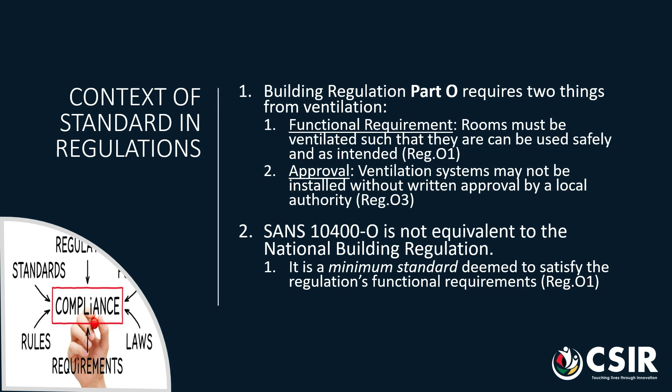As such, the regulations don't prescribe the SANS 10400 Part O as the only mandatory compliance route. The regulation maintains that a competent person is responsible for certifying that installations comply with the functional requirements of Regulation O1.

Regulation AZ4 gives a competent person some scope to use first principles and other recognized standards and methods as references for acceptance criteria. The responsibility, however, remains with this competent person to achieve and prove compliance with the building regulations.

Our hope is that the new SANS 10400-O will prove a suitable standard for engineers who want to achieve acceptable indoor air quality, together with energy efficiency goals.

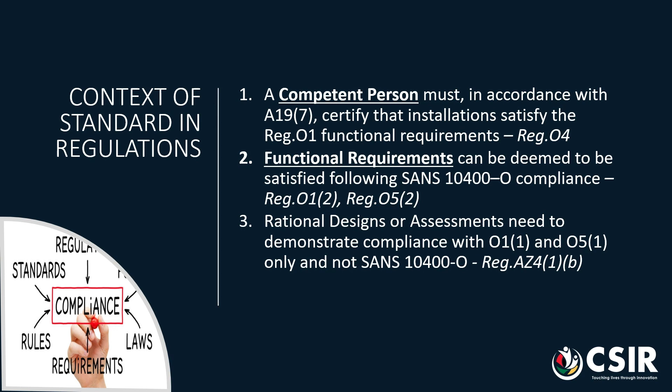There has been a paradigm shift in this standard relating to ventilation metrics and methods, in order to better align with international norms. The air changes per hour performance metric has been completely dropped from the new standard.

Ventilation rates are now expressed in terms of the number of occupants in the occupied zone. This allows high-volume rooms to be ventilated more efficiently.

The ventilation rates, prescribed per room type, as detailed in Table 2, are determined using the additive method. Here, the ventilation portion for occupants and the ventilation portion for the room type are considered separately.

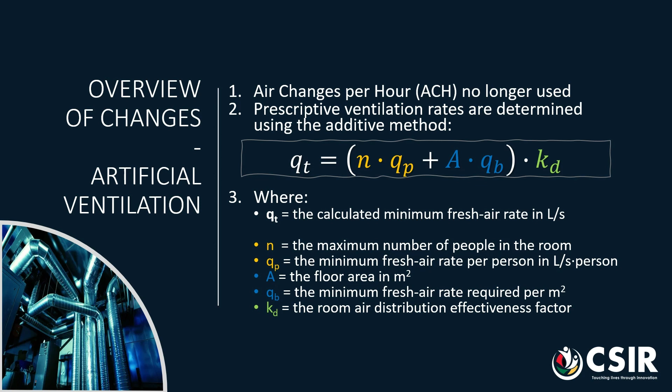You will also see this formula includes a room air distribution effectiveness factor, which we will discuss in some detail later on.

The adoption of the additive ventilation method is probably the most significant change to the standard. It was adopted because the additive method better lends itself to efficiently maintaining air quality in the occupied zone.

It means that the building owner or operator do not waste resources ventilating parts of the building which are neither occupied nor burdened with contaminant sources.

This is because it takes account of the occupied zone only and scales correctly for high-volume rooms. It considers room and occupant-based contaminant sources separately.

In addition, ventilation rates are determined for spaces with adapted and non-adapted occupants differently. In this regard, the volumetric air change rates, or air changes per hour, didn't address the functional requirements of Regulation O1 efficiently. Also, the application of air change rates in the previous standard was inconsistent throughout building and occupancy types.

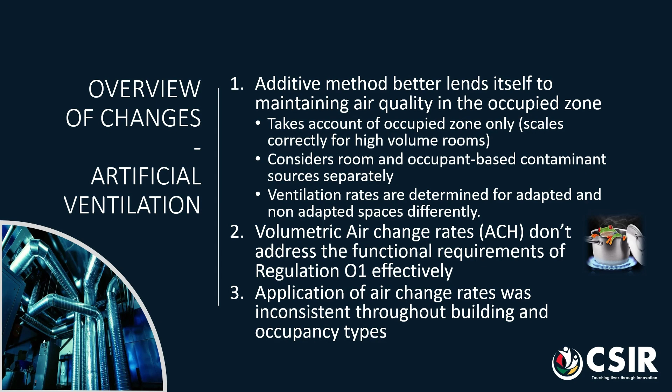We briefly mentioned that room air distribution effectiveness was a factor in determining the prescribed ventilation rates. There's some potential for confusion, as ventilation effectiveness can be defined in a few ways.

In order to be consistent with the functional requirements of Regulation O1, as well as major international standards, ventilation effectiveness is defined as the room's average contaminant removal effectiveness.

This means that a room with fully mixed flow will achieve an index of 1 or 100%. Some may be more familiar with using the mean age of air to define air change effectiveness.

In mixing ventilation regimes, there is a correlation between these different ventilation effectiveness indices. An air change efficiency factor of 50% equates to a contaminant effectiveness of 100%.

The ventilation effectiveness in a single space can differ seasonally, and therefore, the worst case should be assumed. It is possible to determine ventilation effectiveness experimentally using tracer decay methods or validated simulation models.

If these factors are not available at design stage, a lookup table for common configurations is provided in the standard. It should be noted, however, that the room's distribution effectiveness index is a positive scaling factor.

And is therefore the reciprocal of the ventilation effectiveness index, as defined.

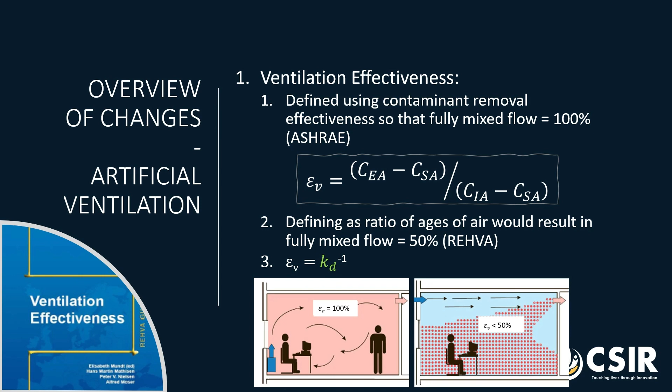The new standard also describes acceptable criteria for the recirculation and reuse of room air. This allows recirculated air, which has been adequately treated, to be reused for primary ventilation purposes.

In achieving this, it is important to note that fresh air is defined separately from outdoor air. Outdoor air is defined in common terms, while fresh air is defined as any air which is sufficiently free from airborne contaminants and can be used for maintaining the required indoor air quality level.

Therefore, extracted air can be treated and reclassified as fresh air according to the limits of the various air contaminant classes defined in the standard.

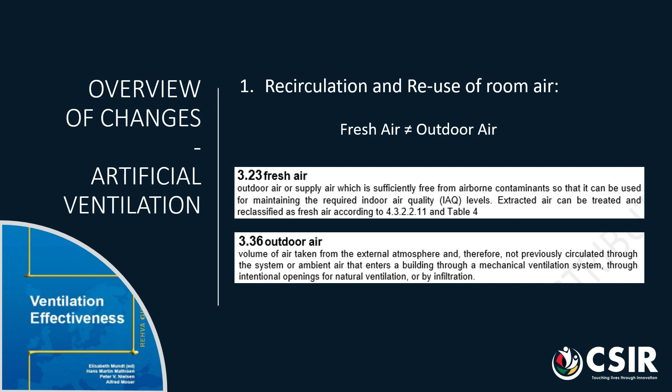Distinguishing between fresh air and outdoor air allows us to incorporate the application of high-efficiency filters and room air cleaner performance into our designs. This means equivalent clean air delivery rates can be included when achieving prescribed fresh air rates. This could permit reduced outdoor air requirements and thereby reduce energy consumption. This is particularly useful in permitting airborne infection control in healthcare facilities, using the most economical methods available. Note that there are limits of application between the air contamination classes as defined in the standard.

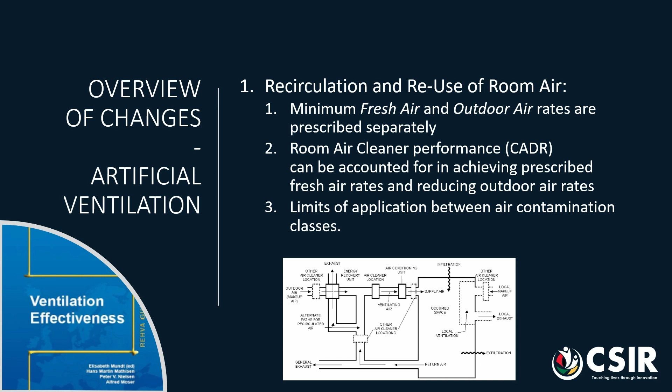Some big changes are also present in describing natural ventilation performance. Equivalent performance criteria for naturally ventilated spaces can now also be found in Table 2. Other natural ventilation criteria are based on best practice guides, such as the CIBSE AM10 and the WHO guides. Mixed-mode ventilation systems are now also recognized and defined, following best practice from the CIBSE AM13. Quite significantly, natural ventilation and air conditioning may be applied in the same space concurrently.

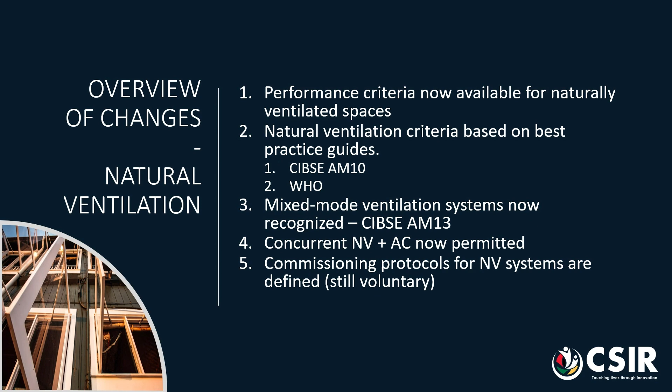Obviously, this should only be done following the component manufacturer's recommendations. An informative annexure has been included as guidance on commissioning and testing of naturally ventilated systems. There is a work plan in place to expand the section into a standalone standard, incorporating ISO 12569. Also covered by the standard are methods for validation of naturally ventilated spaces using tracer gas dilution testing. Typical methods employed here would be CO2 decay or passive step-up tests.

CO2 sensing can also now be used to drive demand control ventilation for intermittently occupied spaces. Take note, as there are specific rules regarding run-on times and post-occupancy flushing.

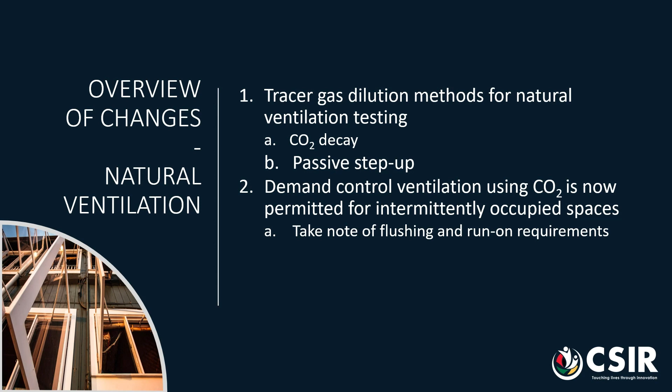Performance criteria are now available for naturally ventilated spaces. These criteria are prescribed as indoor carbon dioxide limits, which are based on mass flow balance calculations, using ventilation equivalents in liters per second per person. You might be familiar with the equation shown here. The assumption is made, for most spaces, that the concentration of CO2 in exhaled breath and outdoors is constant, as is the volume flow of a room occupant's breath.

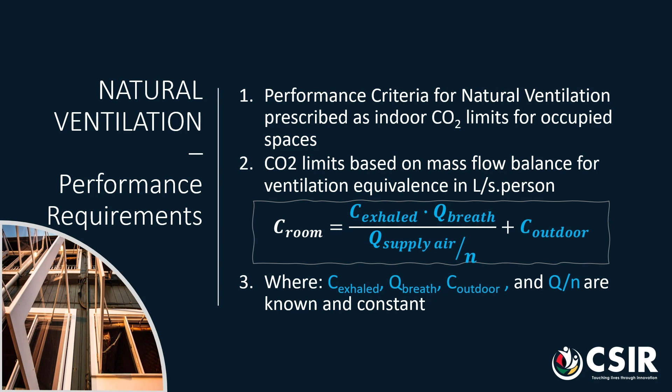It would be a good idea to run through the process by which the minimum outdoor airflow quantities are selected for your designs. A typical room data schedule, supplied by a developer to an engineer, could contain information as represented here. It is not unusual for the engineer to have restrictions placed on the arrangement of the ventilation terminals, and for scant information to be available on occupancy densities or indoor air quality requirements.

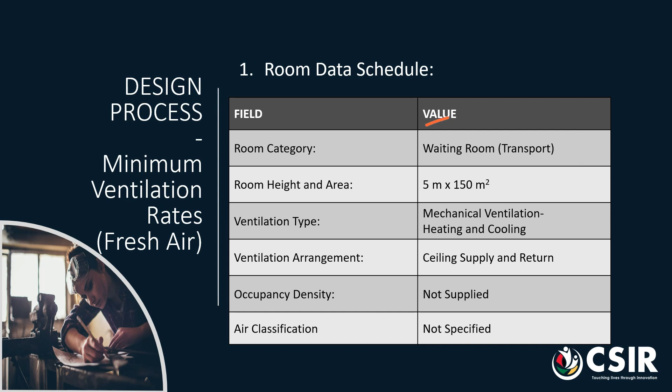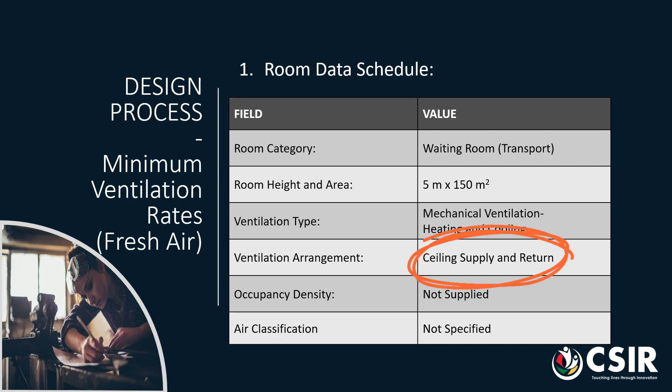For our example, we'll assume a waiting room for public transport using the following room size and height. The space will be mechanically ventilated with heating and cooling supplied through the ventilation system, with supply air and extract air registers at ceiling level. We've already been introduced to the equation for calculating the minimum fresh air rate. We can now run through how the various parameters are obtained.

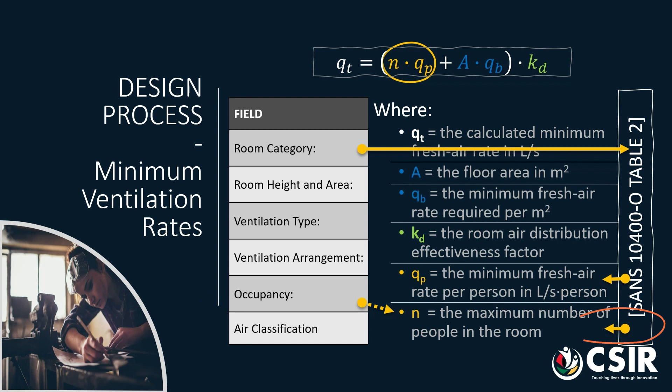Firstly, QT is the resultant fresh air rate we want to calculate in liters per second. For the first term, we need to calculate the product of N and QP. N is the maximum number of people in the room, and QP is the prescribed minimum fresh air rate required per person. If the design occupancy of the space is given by the developer, then that value should be used. In the absence of design occupancy values, the default values presented in Table 2 of the standard can be assumed. The minimum fresh air rate, QP, should be taken from the standard.

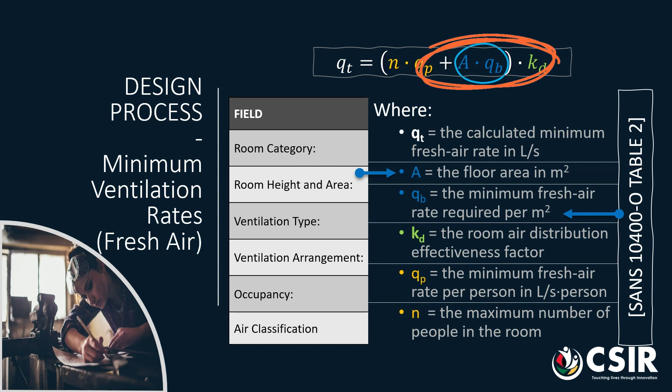Next, we need to calculate the area portion of the total fresh air requirement. This is the product of the floor area, and QB, the minimum fresh air rate required per square meter. The floor area is already given, and QB is found in Table 2.

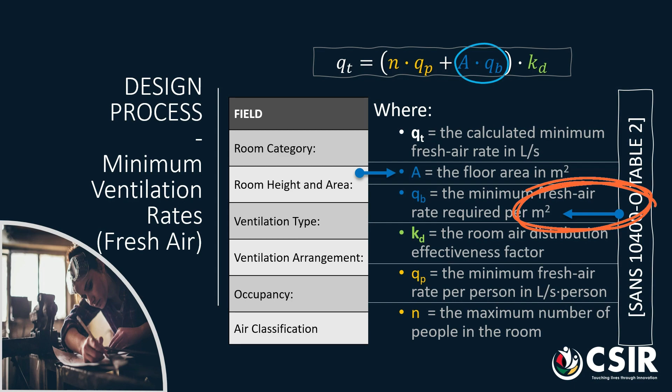Back to column 2 of Table 2. In this case, QB is 0.7 liters per second per square meter, and the product of N and QB gives us 105 liters per second. This calculated value is the outdoor air baseline for the space, and represents a baseline ventilation rate for demand control applications.

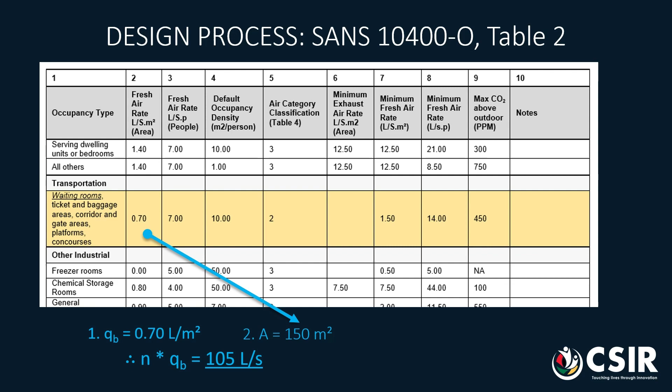Next, we need to determine the air distribution effectiveness factor. For this, we refer to Table 3 of the standard, and use available design information, such as ventilation type, ventilation arrangement, and air classification requirements.

This is an extract of Table 3, detailing some basic ventilation configurations and their related effectiveness factors. Configuration 2 best matches our example, where we've got a ceiling supply of heated air, which would not reach within 1.4 meters of the floor during worst-case winter scenarios. I understand that better design solutions are available in these cases, however this example is intended to illustrate the impact of limited design choice and suboptimal configuration options.

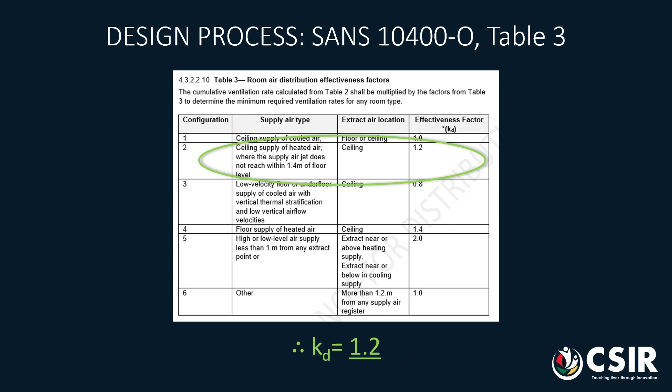Configuration 2 gives us an effectiveness factor of 1.2, which would be equivalent to an air change efficiency of 80%. This calculation may look complicated to the uninitiated, however it's quite a simple algorithm. It's merely the sum of the space and the occupancy ventilation portions, factored by the air distribution performance potential. Putting these values through our algorithm gives us a minimum fresh air rate of 252 liters per second.

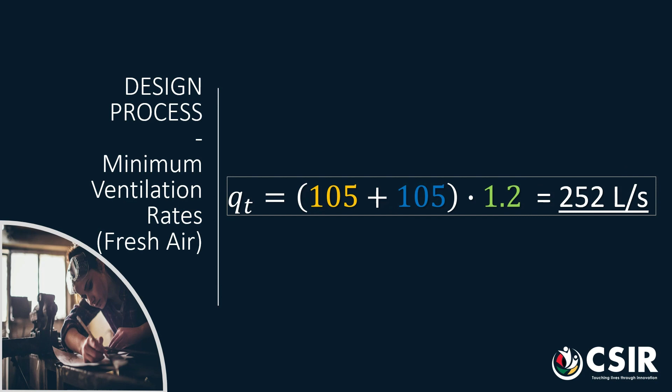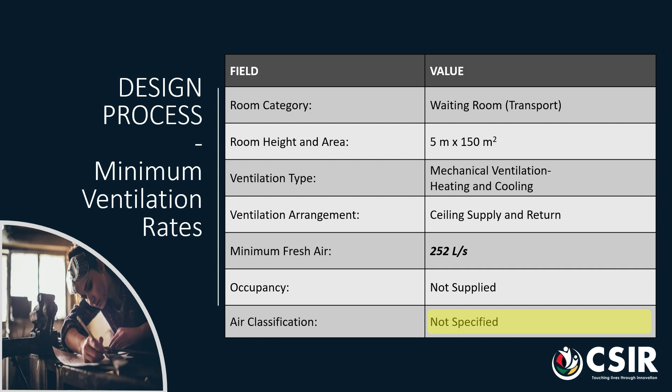So now that we've determined the minimum fresh air rate, all that's left is to determine what portion of this 252 liters per second of fresh air must be actual outdoor air, remembering that these are not the same thing. To do that, we need to consider the indoor air quality and contaminant levels of the space in relation to adjacent spaces. Before we can talk about extracted air and its reuse, we need to have a quick discussion around the current air filtration standards used in South Africa.

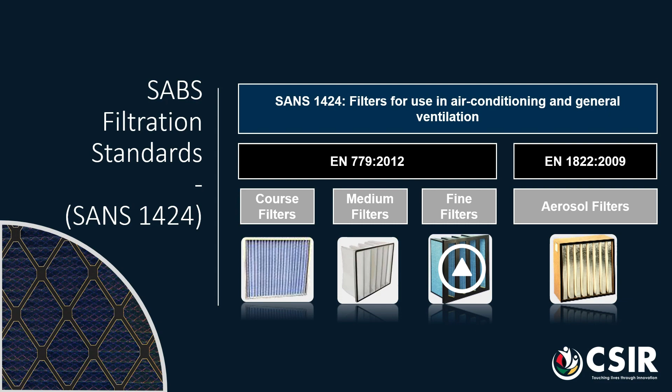Filtration standards are generally divided between those for general filters and those for aerosol filters. South Africa hasn't yet incorporated a standard for aerosol filters, however for general filters, SANS 1424 is an adoption of the EN equivalent, and thereby incorporates the EN 779 standard. The EN 779 has divided general filters into coarse, medium, and fine categories, each of which has its own test methodology and classifications.

It's easy to demonstrate the problem with South Africa's current filter selection standards by trying to select a 70% efficient filter. A coarse G2 filter has an average arrestance of 70%. A medium M6 filter has an average efficiency range which also covers 70%. And a fine F9 filter has a minimum efficiency value of, you guessed it, 70%.

Because of the practical disconnect between some of the synthetic dusts used in these standards and real-world atmospheric dusts, these standards and classifications do not provide a solid basis for predicting operational performance. The same is true of ASHRAE's MERV classifications. This can create significant uncertainty when designing for filter performance, and when selecting replacement components, as the discussed filtration classes also don't correlate with factors for respiratory health, which is a chief requirement of the building regulations.

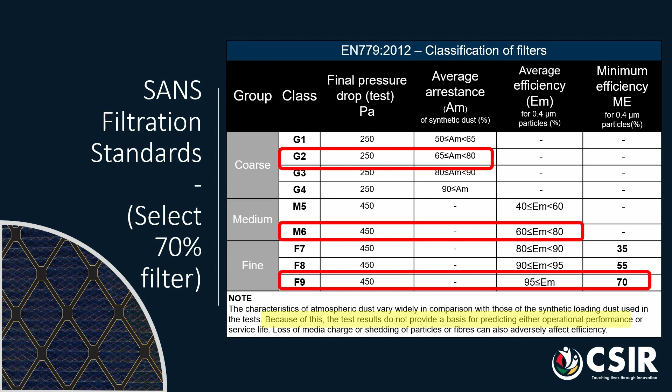This problem was recognized quite some time ago, and therefore the EN 779 standard was removed, and replaced with the ISO 16890 in 2018. The new ISO standard is a complete paradigm shift in filter classification, and the resultant filter classes are not equivalent or comparable to those of the EN 779.

Filters are now classified according to their PM10, PM2.5, and PM1 efficiencies. Newer standards for aerosol filters, such as HEPA filters, are also available, however the EN 1822 is still valid and appropriate.

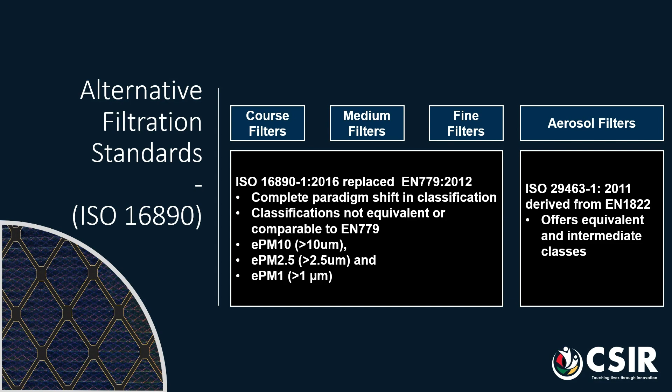With this understanding, the ISO 16890 is a useful standard for designing around required indoor air quality levels. A designer can use this to determine the exact filtration efficiency required for specific pollutants and for respiratory health.

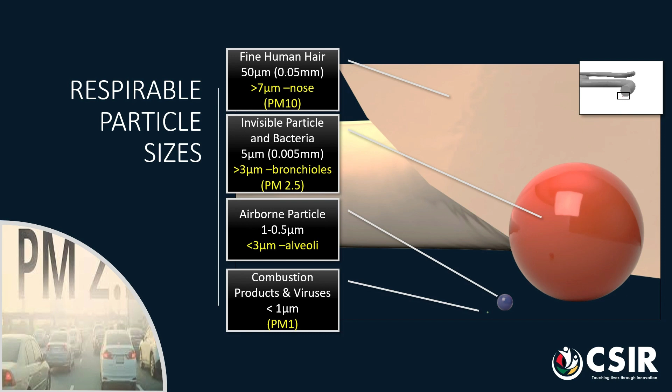I'm sure we don't need to elaborate on why we would want to recirculate room air, but for consistency, and the few that might be new to the topic, it could be useful to confirm here that a conditioned space, maintained at 22 degrees Celsius, could realize an energy cost reduction of around 80%, with the simple limited application of recirculation and reuse of conditioned air. Permitting recirculation makes more capital available for building operation, like maintenance and upgrades. The recirculation of room air can, however, result in lower indoor air quality if underspecified.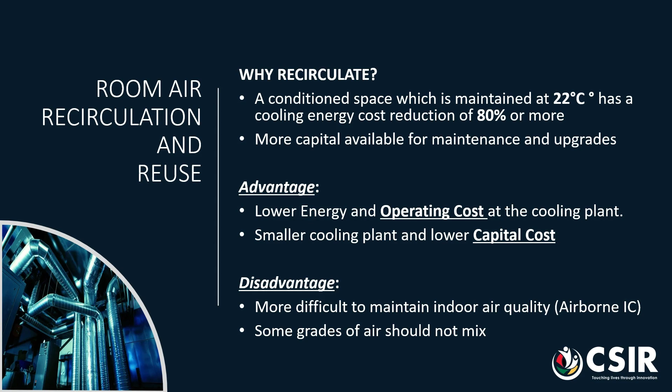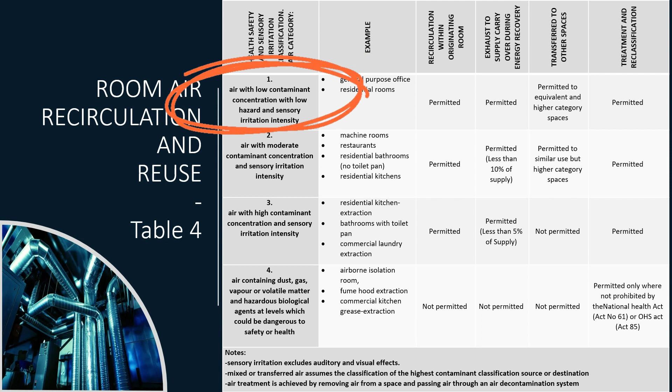There are also some restrictions on recirculating certain air contamination classes. Table 4 of the standard defines the health, safety, and sensory irritation classifications for room air, and prescribes permissions and prohibitions on its recirculation and reuse. Here, we have defined 4 categories, from air with low contaminant concentrations, to air with contaminants at concentrations which are potentially dangerous to health or safety. 3 reuse options are described, as well as limitations on treatment and reclassification.

Finally, we can get back to our case study of the transport waiting area. I'd imagine we'd all agree that the classification for the air in this space should be low contaminant concentrations, with low hazards, under normal operating conditions.

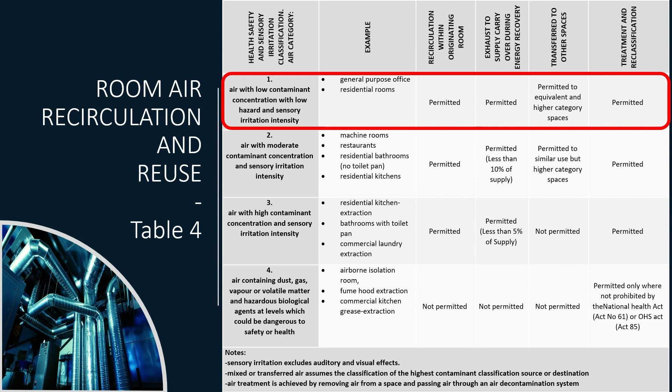Therefore, Table 4 permits us to recirculate our extracted air within the originating room. It also permits a level of carryover between the exhaust and supply air streams of any energy recovery equipment. It allows extract air to be transferred directly to other spaces of equivalent and higher contaminant categories.

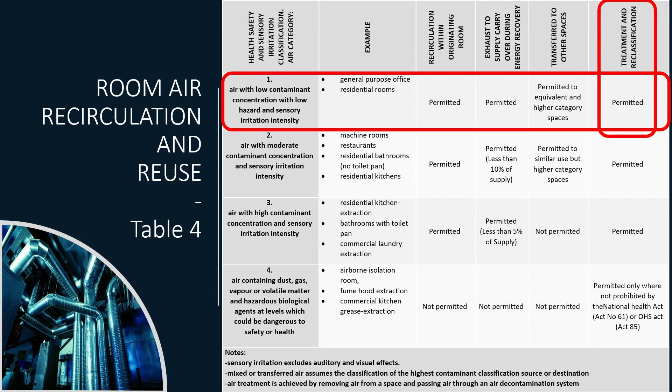Although not really relevant to our case, treatment and reclassification of this air is permitted. This implies that the air can be filtered or purified and reused elsewhere. In summary, extracted air shall be categorized according to Table 4 or Table 2, as applicable. Table 4 allows the treatment and redesignation for recirculation of air on condition contaminants of concern are controlled.

This includes both particles and odors. Remember, however, that fresh air may not comprise only treated and recirculated air, but must include a portion of outdoor air, not less than that determined by equations 5 and 6 of the standard.

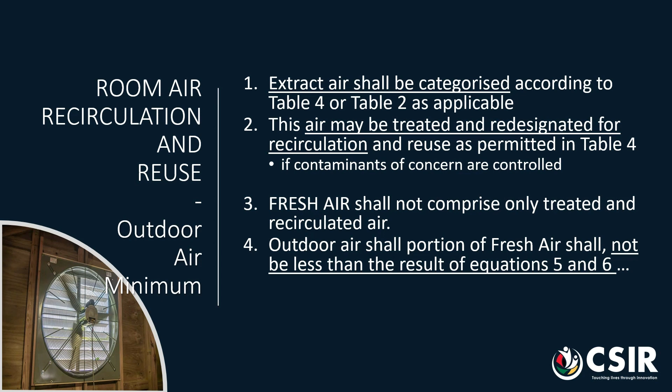Here we have equations 5 and 6. Equation 5 refers to the penetration, or bypass, of an air decontamination system such as filtration. Equation 6 puts a limit on the amount by which the occupancy portion of the fresh air rate, n·qp, can be reduced. Note that equation 5 uses a ventilation effectiveness factor, which can be substituted with the reciprocal of the distribution factor of Table 3.

What these equations do is describe the minimum amount of outdoor air that is required to be mixed into the fresh air when room air is treated and recirculated. Understand that higher ventilation rates may be required to address indoor heat loads and may demand that the supply air quantity greatly exceeds the prescribed fresh air rate.

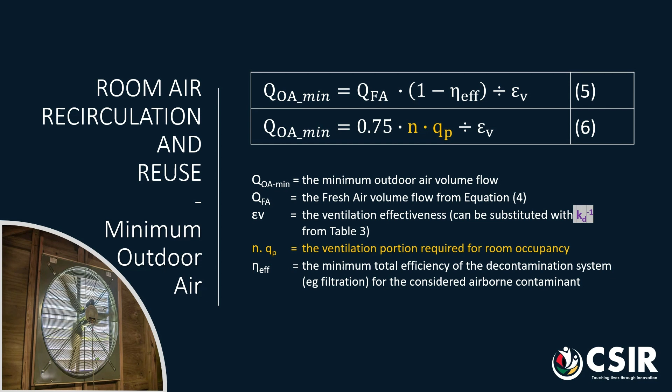The use of room air cleaners is coming into prominence, and the standard addresses the application of permanently installed devices. It refers to air recirculating units, which employ pollutant removal and destruction technologies, such as particulate filtration and ultraviolet germicidal irradiation, respectively. In order to use such devices within these standards, their independently verified performance must be determined by accredited facilities, such as that at the NIOH.

Equation 5 uses the minimum total efficiency of the system for a considered contaminant. However, this can be factored for by using equivalent clean air delivery rates. As with any ventilation system, the room air cleaner's air distribution effectiveness must be factored, as per Table 3. However, the worst cases given in Table 3 would typically apply here.

We also know that not all room air cleaner technologies are considered appropriate or safe. You should refer to the excellent ASHRAE monograph on this topic for more.

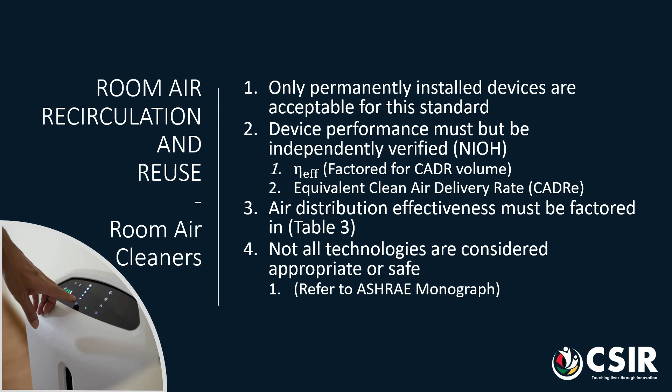There are several standards available which support the classification and application of room air cleaners. Many of these standards, however, are still under development or in draft. Two applicable standards are locally under active development within the upcoming SANS 2083 set of standards. ISO and ANSI also have emerging standards, with the AHAM AC01 being the most useful at present.

Keep an eye out for the emerging AHAM AC05 standard, which addresses the reduction in viability of microbial air contaminants. By contrast, the older AC01 standard doesn't consider the viability of airborne contaminants.

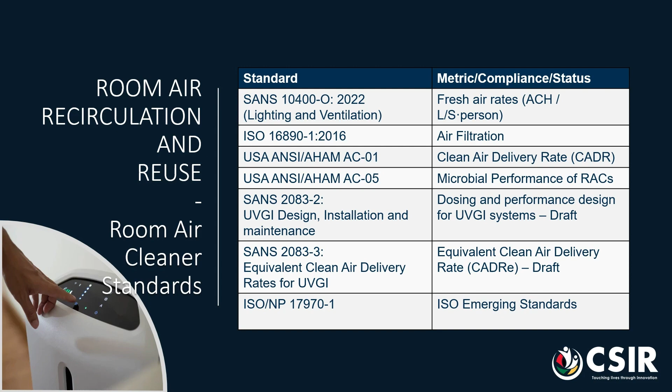The new SANS 10400 standard deals with exhaust air systems comprehensively. In total, there are nearly 35 clauses and subclauses dealing with the matter. Some highlights from the section include:

Local exhaust ventilation systems shall achieve a room average contaminant removal effectiveness of greater than 1. Contaminated exhaust air should be discharged outside of the building's roof recirculation region. Contaminated air should be discharged in a way that prevents entrainment into the leeward recirculation zone of a building. Contaminated air should only be discharged in a way that prevents entrainment into the building's leeward recirculation zone.

It should also not be discharged towards any potentially occupied zones. This applies especially to the trafficable areas within equipment and plant rooms. The vertical discharge of air containing airborne hazardous biological agents should be at least 14 meters per second. These zone types are defined in this standard, but for more information, you should refer to the Industrial Hygienist's Ventilation Manual.

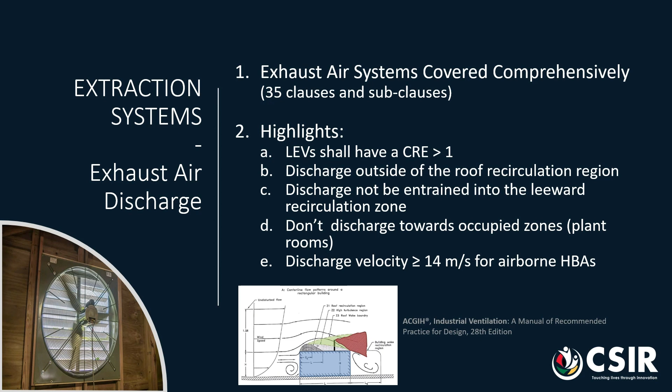It is now explicitly permitted for extraction systems to be interconnected with lighting, but only if run-on times are no less than that determined by equation 3. Any extraction system developed in terms of this equation would obtain an approximately 90% reduction in airborne contaminants between when the room is vacated and when the fan is automatically turned off. This is to ensure that sufficient residual contaminants and moisture are removed from the room, so that a damp or moldy environment does not develop.

Extraction systems serving residential bathrooms smaller than 8 square meters no longer require a rational design, assuming the prescribed minimum ventilation capacity is met.

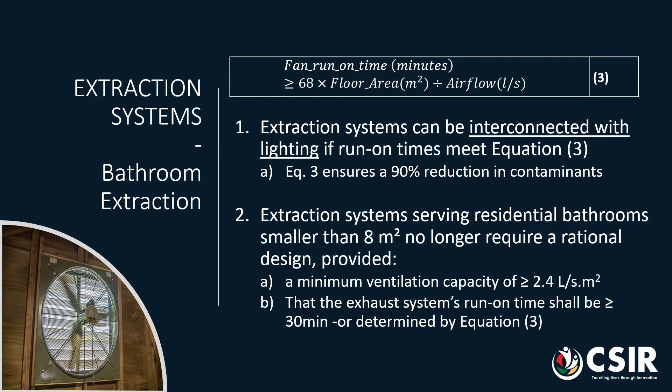This slide is a bit of a diversion, as it relates to the standard in the context of airborne diseases such as COVID and tuberculosis. The standard alludes to the fact that the safe discharge of contaminated exhaust air is possible where there is sufficient separation from ventilation inlets and the discharge is not into an occupied area.

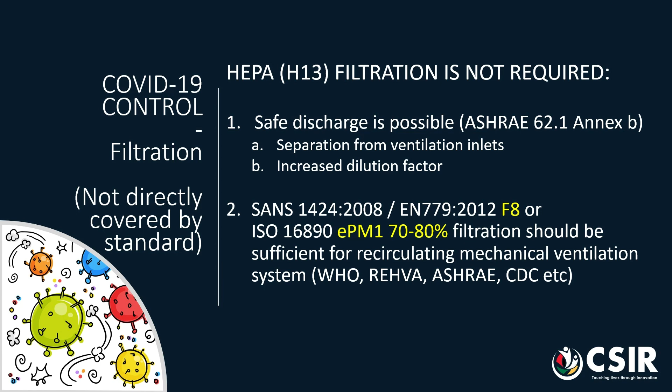The standard also describes methodologies for filtration of recirculated air. In the context of filtration levels for COVID, you could refer to guidance from the WHO and REHVA, etc., for the suitability of F8 or ePM1 80% filters for general settings. This is not much different from what would normally be recommended to keep interior spaces visibly clean of environmental dust.

Some more good news is that the standard now encourages the use of demand control ventilation to adjust the occupancy portion of the outdoor air intake rates as occupancy conditions change. This was not previously permitted.

There are naturally some limits to the application. The control only applies to the occupancy fresh air portion, while the prescribed minimum fresh air rate per square meter must be maintained. Demand control ventilation is also only permitted in spaces of air contaminant categories 2 or 1.

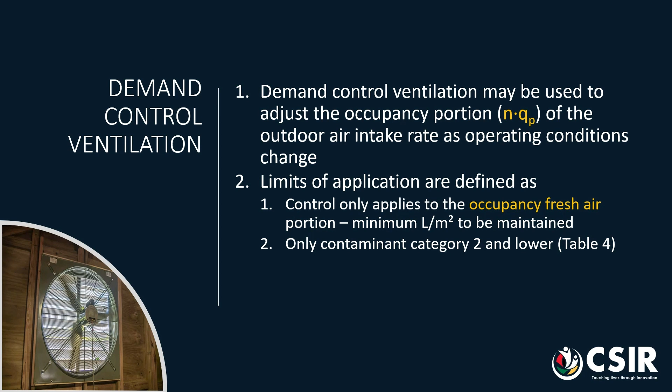The standard dictates that natural ventilation apertures must be either manually or automatically controllable. The thinking behind this is that where room occupants are given opportunities to control their own environment, they tend to utilize natural ventilation more frequently than artificial ventilation.

If ventilation control is taken away, and the occupants are dissatisfied with thermal comfort levels, you frequently find ventilation apertures having been blocked or sabotaged. Offering controllable apertures gives occupants options beyond permanently impairing openings.

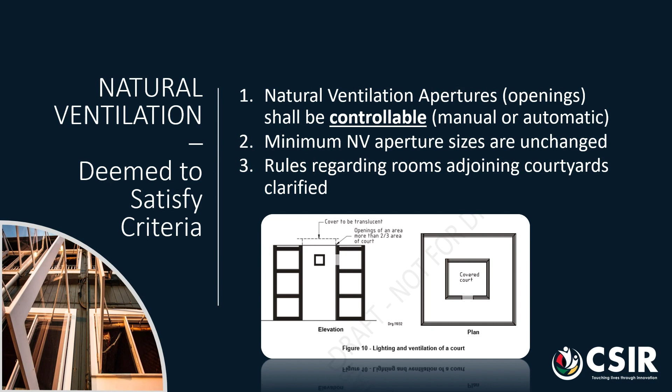The minimum natural ventilation aperture sizes and the rules for rooms adjoining courtyards have been clarified, as these were previously reported to be ambiguous. There are now also firmer rules guiding the architectural layout of natural ventilation apertures.

To improve the performance of naturally ventilated rooms, the room's dimensions are limited in depth. Limiting the distance between any point in the occupied zone of a room and the nearest ventilation aperture to less than 2.5 times the floor-to-ceiling height can limit air stagnancy.

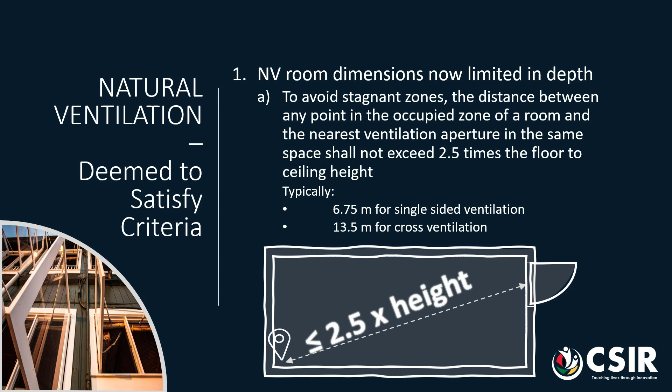This prescript would typically limit the depth of rooms with single-sided natural ventilation to 6.75 meters, and to 13.5 meters for rooms with cross-ventilation or central ventilation stacks.

There's a new requirement specifically for naturally ventilated rooms with heights exceeding 3.5 meters. The standard prescribes the inclusion of high and low ventilation apertures above and below the neutral pressure plane. This inclusion will promote stack effect ventilation and prevent stagnancy in the occupied zone.

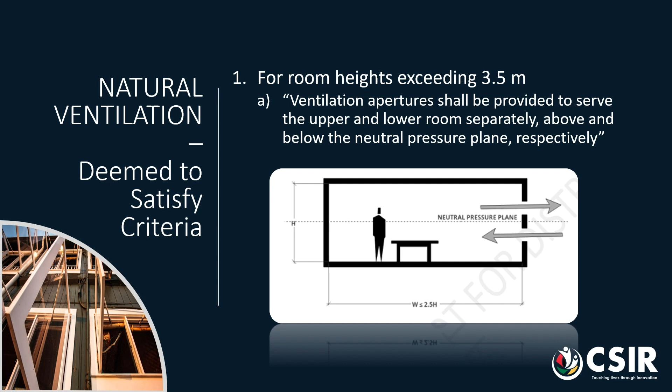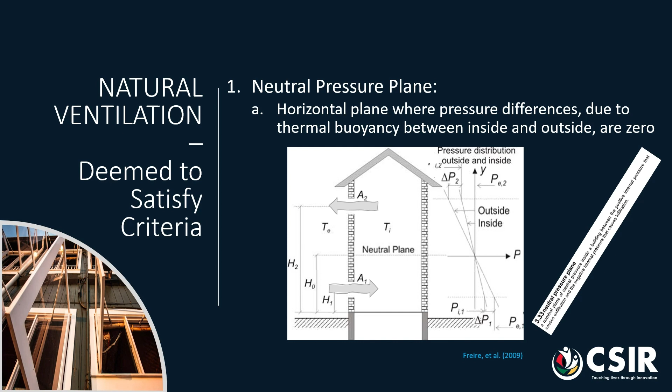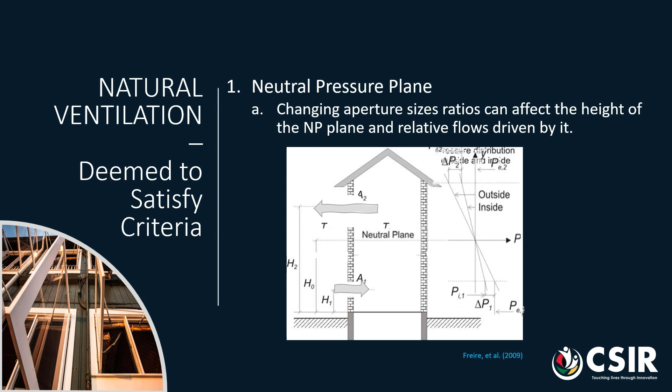The position of the pressure plane is dependent on the ratio between the sizes of these apertures. This effect can be used to balance the air flow between spaces in the building, but that is a topic for another day. The standard has a couple of informative annexures.

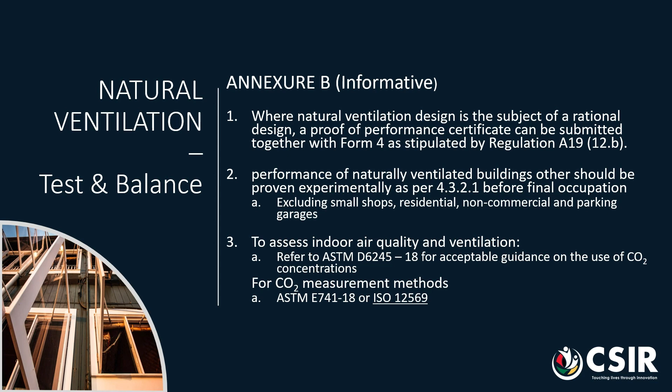These are provided for information only, and are not mandatory. The first annexure discusses test and balance requirements for natural ventilation systems. It refers to ASTM and ISO standards for tracer gas decay testing using CO2, but suggests that this is not applicable to small shops, residential buildings, non-commercial buildings, and parking garages.

The second annexure is intended to raise awareness around the radon risk in South African buildings. Radon gas is dense and can accumulate in low areas of poorly ventilated buildings, especially near current or previous gold or uranium mining activities. Buildings with exposed granite are also at particular risk.

The contents of this annexure may be included as a normative section in future editions of the standard, as better data becomes available.

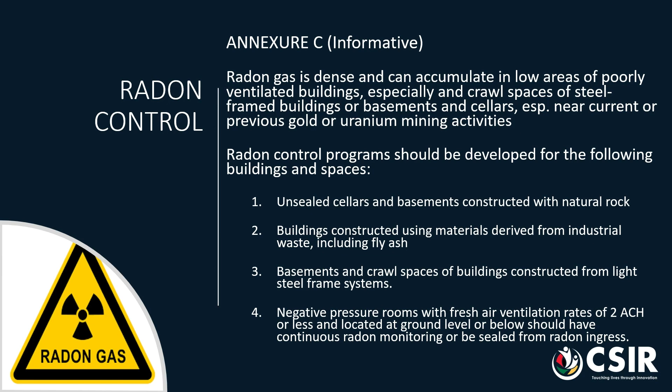This has been a fairly quick summary of the main points of the standard, and the viewer is encouraged to re-watch this overview if there is still uncertainty. The SABS can be approached for further clarification.

Public participation in the standards development process is encouraged, and well-motivated contributions received during the public comment period will be considered for the final version of this new edition of the standard.

Daylighting design is still a weakness and needs contributions from technical experts to improve it further. Domain experts are welcome to join technical committees and working groups.